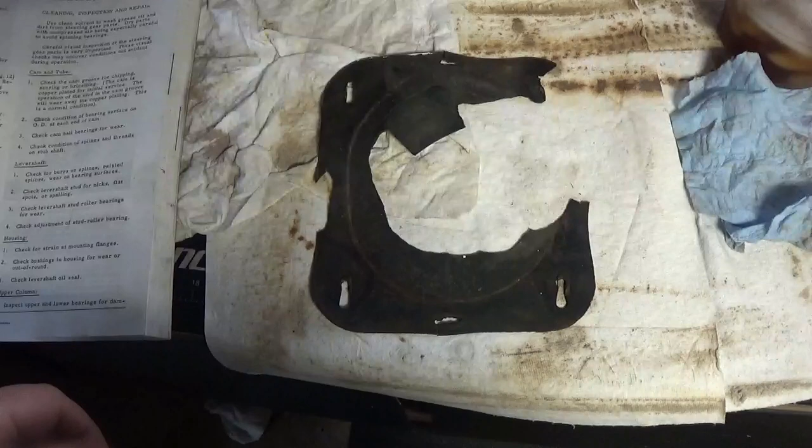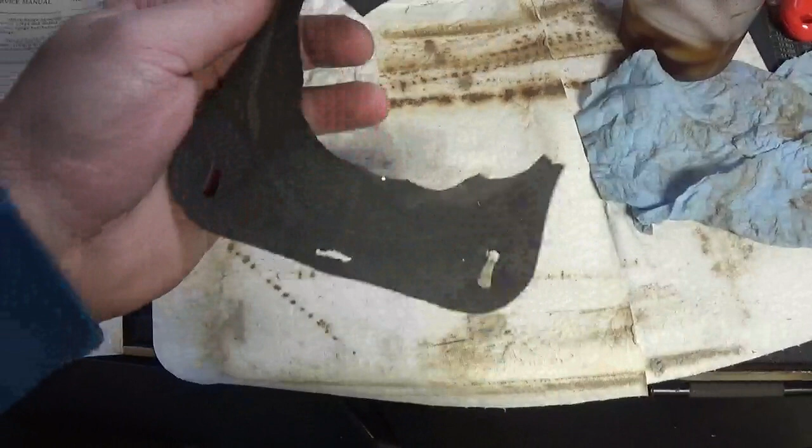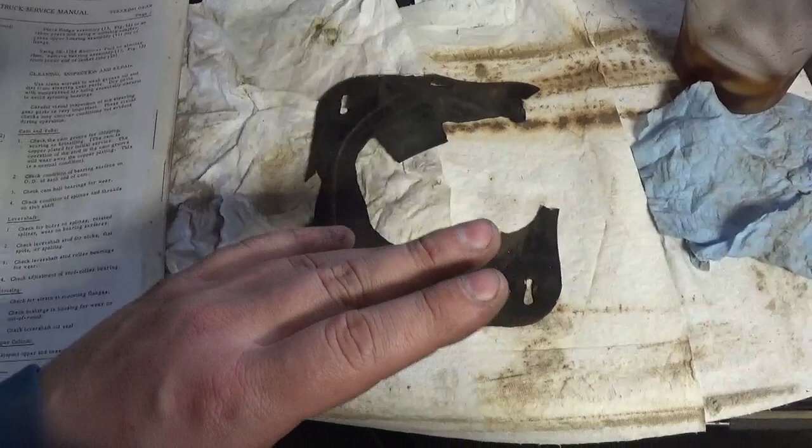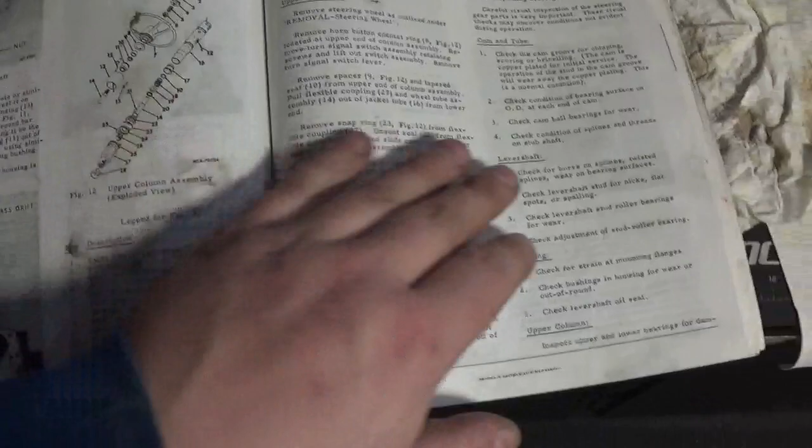In front of you is the steering column seal to the firewall, or what is left of one anyway. I purchased the 3D printed ones that Scouter 1 sells, and they are nice. However, after I pulled the steering column, made it all pretty, and put it back in, the seal doesn't line up with the steering column. I've looked in all my books trying to piece together something I might have done, but nothing really stands out.

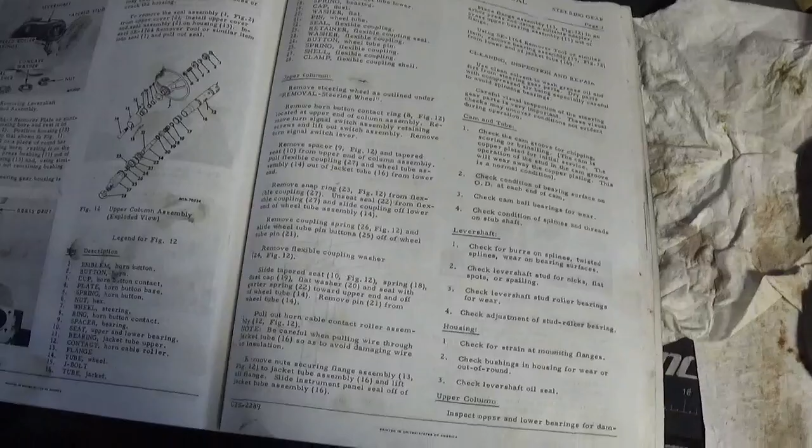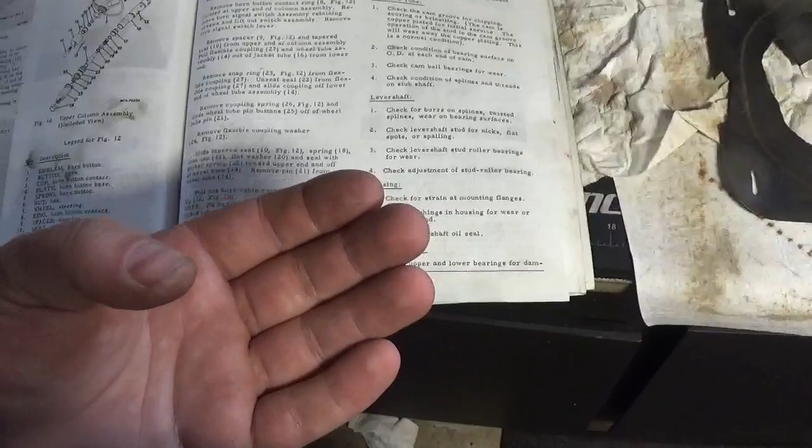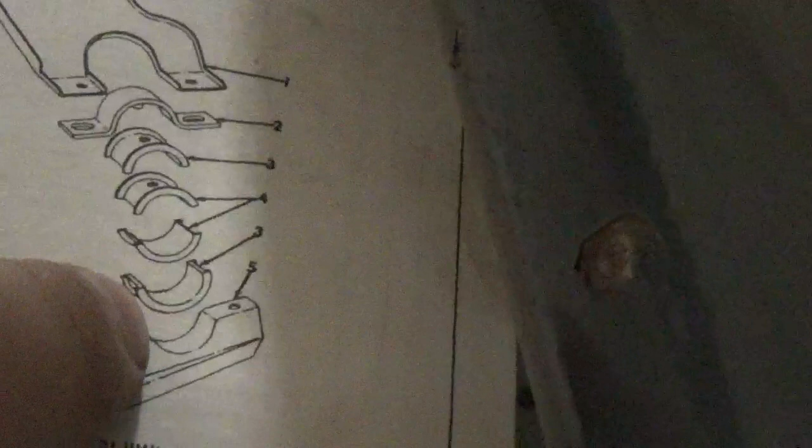The other book shows the two seals that go under the steering column, and it's kind of funky. It's got two rubbers with holes, and then two rubbers with no holes. And I currently just have the two rubbers with holes.

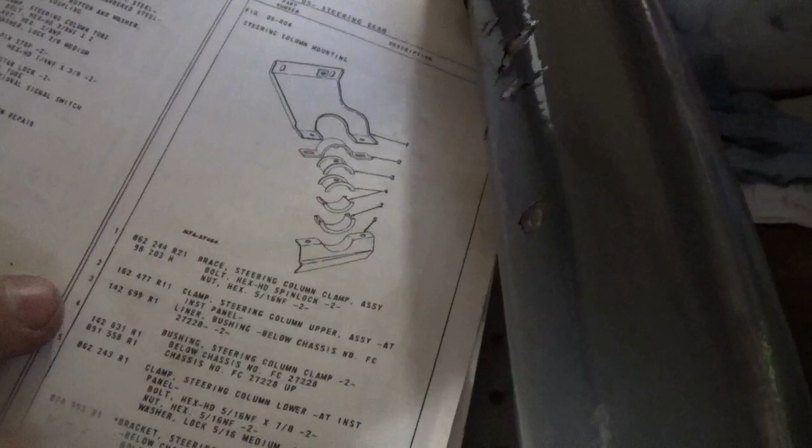So I guess I just need to decode what I need. But either way, it just doesn't look right if I do that. It just doesn't look right. I do have another steering column, I guess I could look at that.

See, what happened is that I was laying on my back trying to put the seal together from the firewall to the steering column, and I might have lost my temper a little bit and smashed the seal.

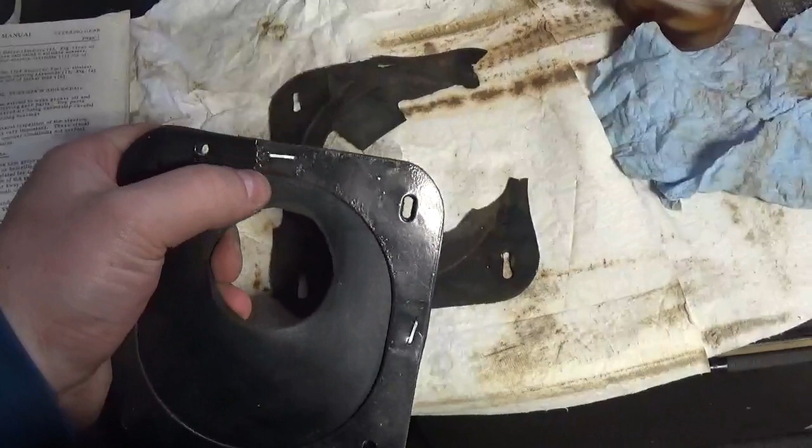So anyway, we went with the old way, I suppose, and I ended up having to cut this when I took it off the first time, so I very crudely welded that joint, gave her a fresh coat of paint, and then bought some rubber off of Amazon, and there it is. Look at that. It was like 20 bucks, plus labor.

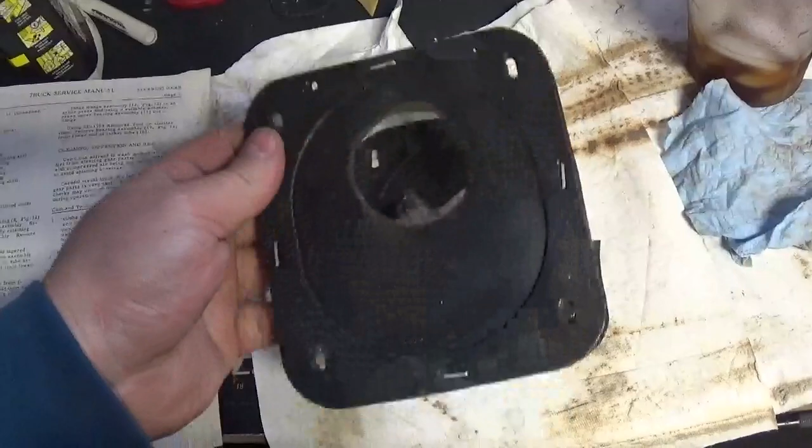These are hard to find, and if you can find them, they're just shot like this one. $30 on eBay. I know what I have.

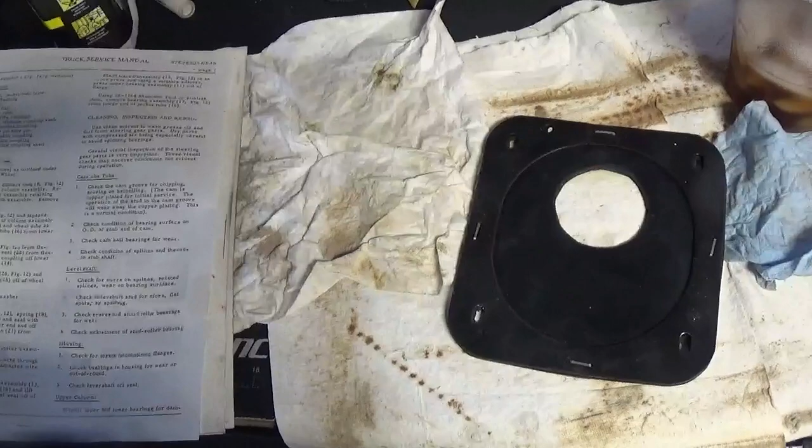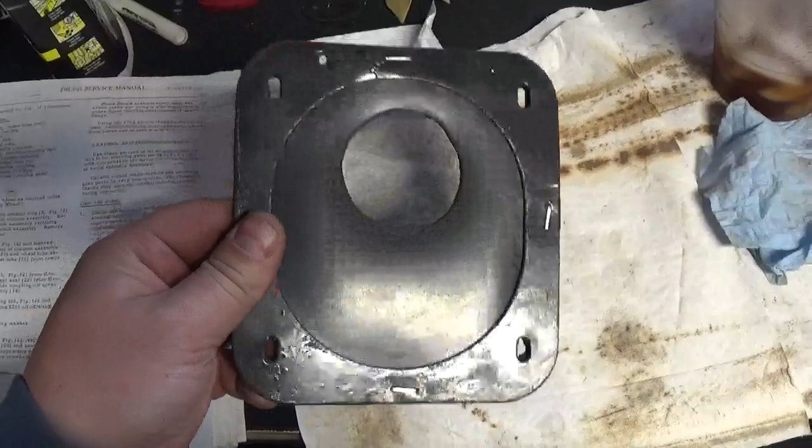Anyway, I'm going to install this seal, hopefully successfully today. I'm going to take another deep dive into my books, and then we'll go from there, I suppose.

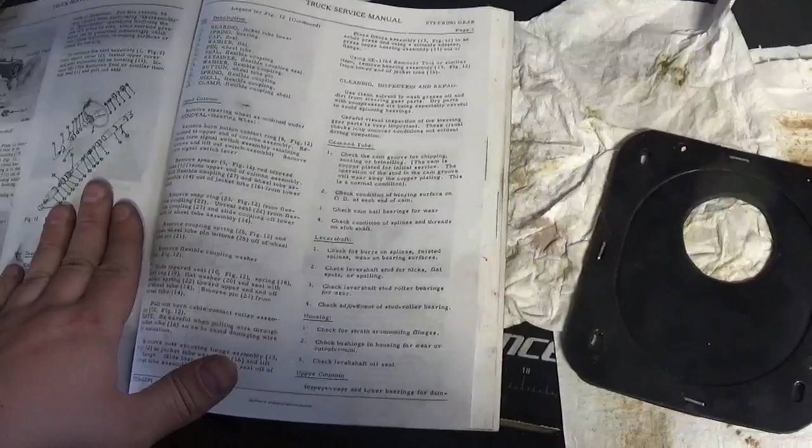The main reason I'm motivated into getting this stupid steering column correct is that I bought a radiator, and they aren't giving those things away for these things. So the hope is to work on the crappy part first, and then work on the less crappy part after, and then the reward is that you can hear it start for the first time in forever.

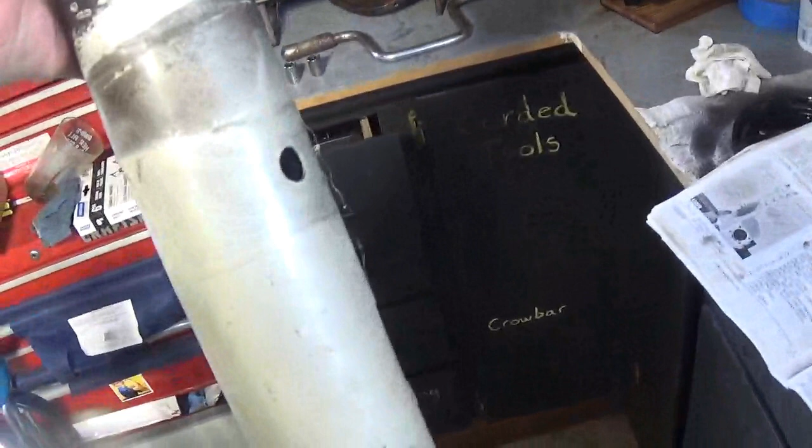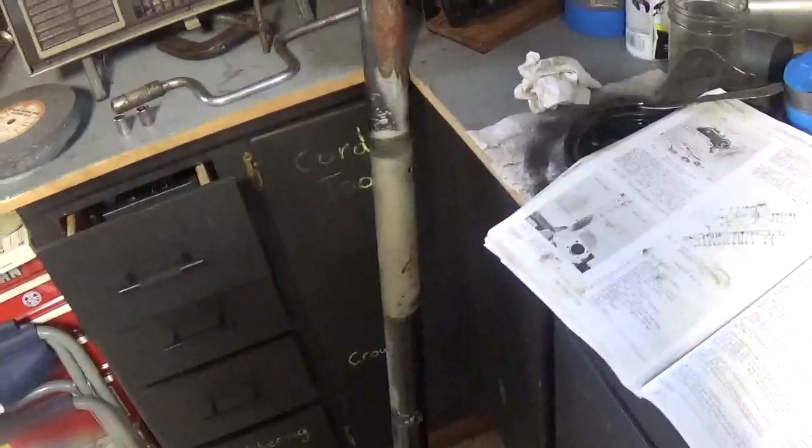That one looks like it had rubber on it, on both sides. Well, crap. Alright, well, I guess that answers that question.

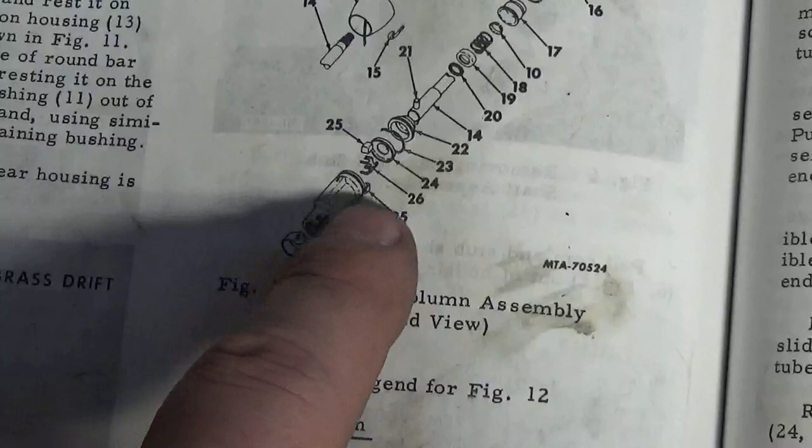Let me put this one in. I'm probably going to have to lube it, probably use some good old Sil-Glyde here, and just lightly lube the steering column, bolt this up against the firewall, and then thread the steering column through it. I'll have to take off this portion here that goes into the steering box, but I think everything else should be able to just slide right through it here. No problem.

And the long and strung out saga of the steering column will be finished. The steering box, on the other hand, that's probably another video. So let me get to wrenching here, and I'll bring you back when things progress.

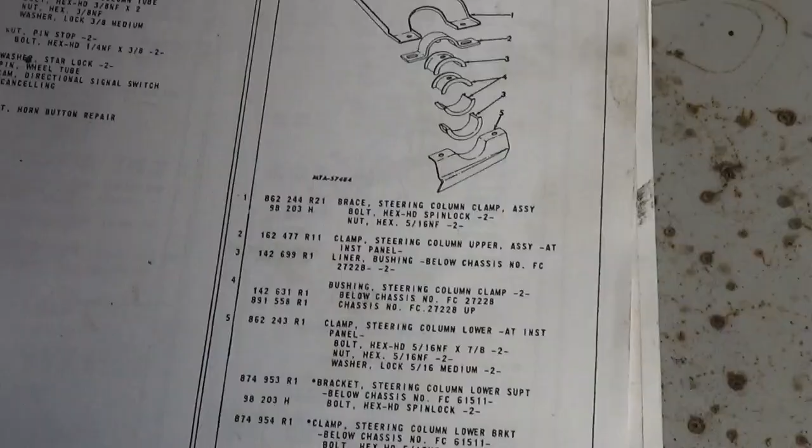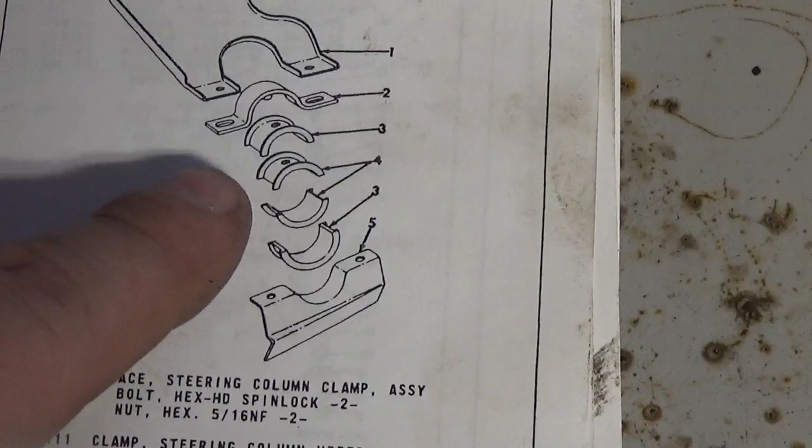Alright, so I have one with a hole, and I have another one with a hole. And according to the diagram, I should only have one with a hole. So at some point, somebody else has been in here. I don't think it would make that big of a difference if they both have a hole. It definitely needs to have a rubber gasket on top of it, or else it just fits too sloppy on the steering column.

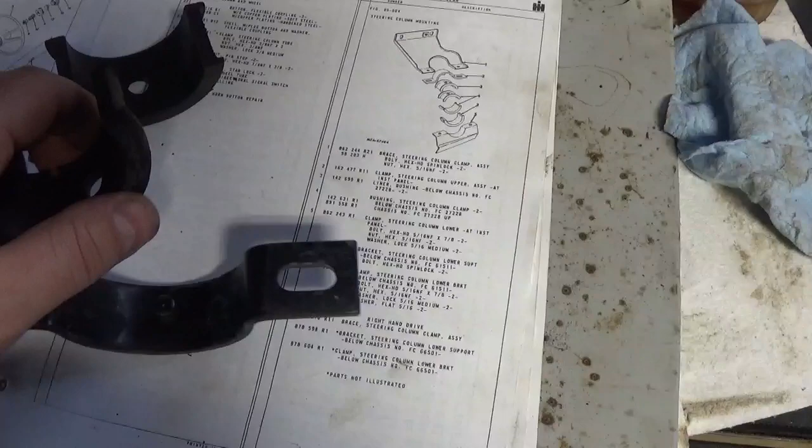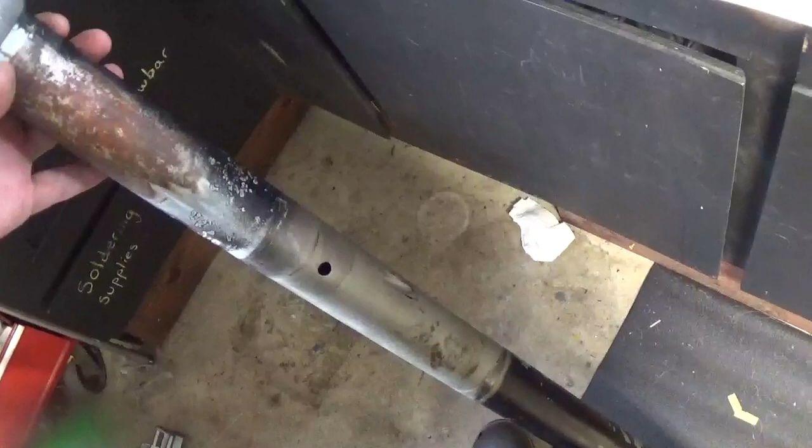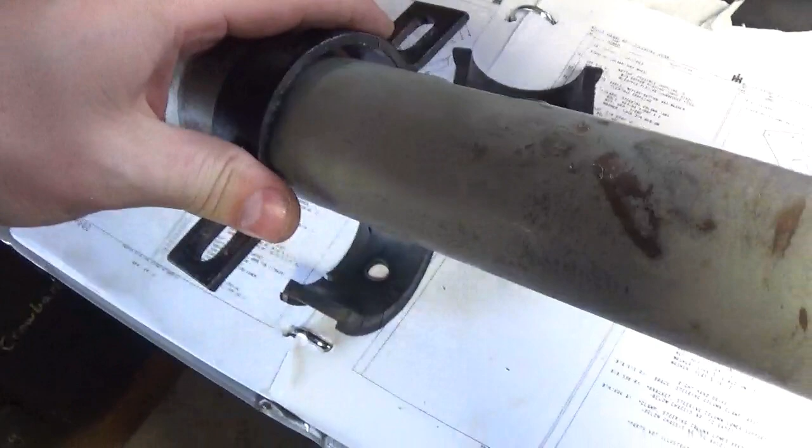And then the arrangement of the pin there corresponds to the hole on the steering column. So without a gasket, not so great. So we need to have a gasket.

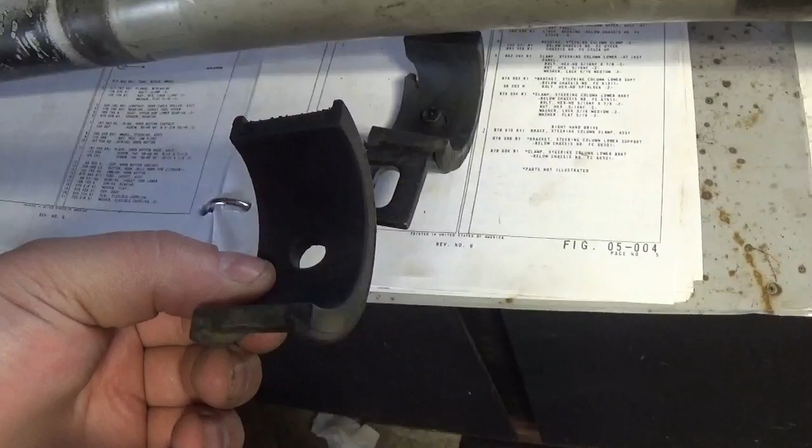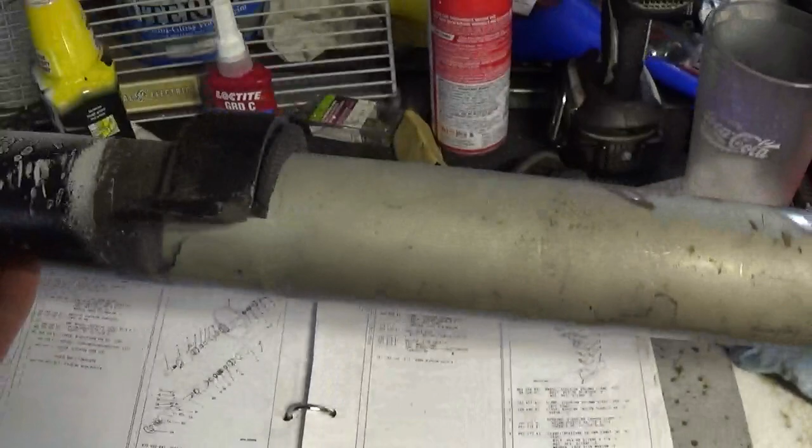The gasket orientation doesn't matter, but the orientation like that won't fit on. Like that. There it goes. So there's one orientation, and there's the other.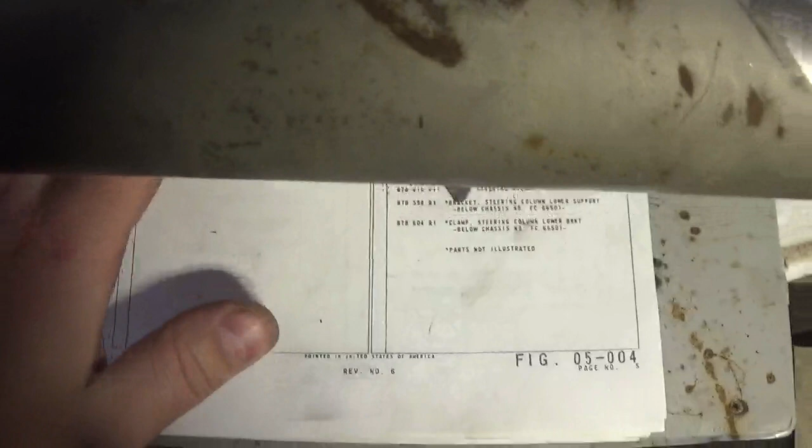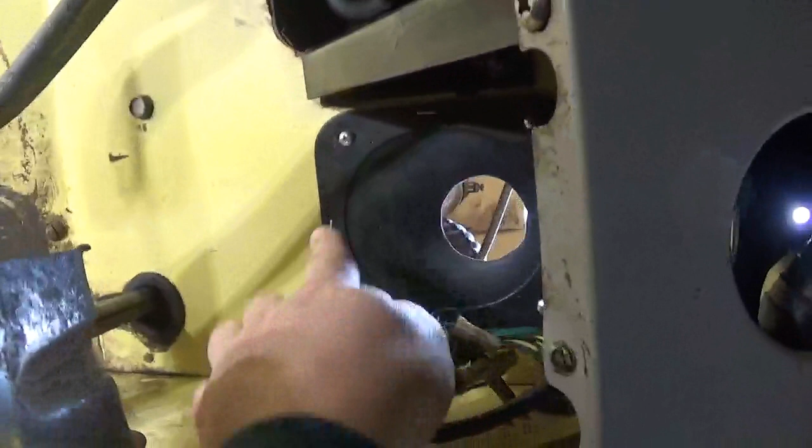So we're gonna figure that out, I suppose. But the gasket looks nice. Those are just some sheet metal screws. I couldn't find what was in there before, or I don't remember.

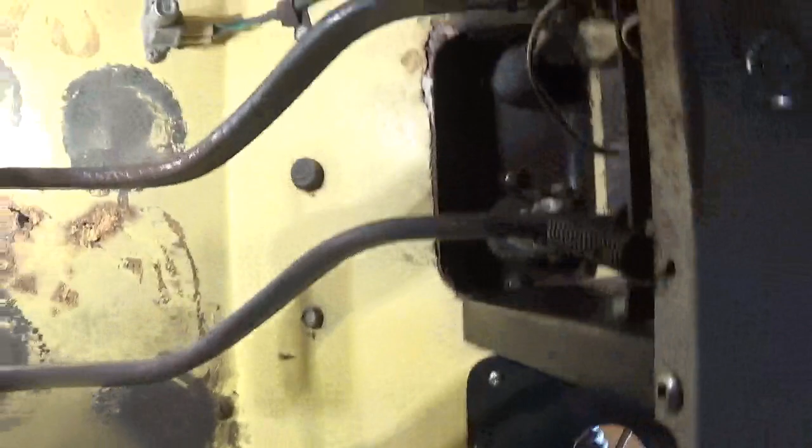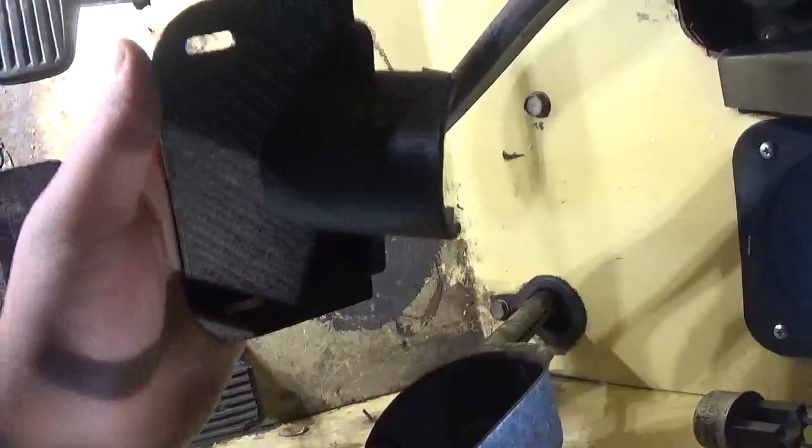I know the kit that you buy from Scouter One comes with screws. So there's one half anyway.

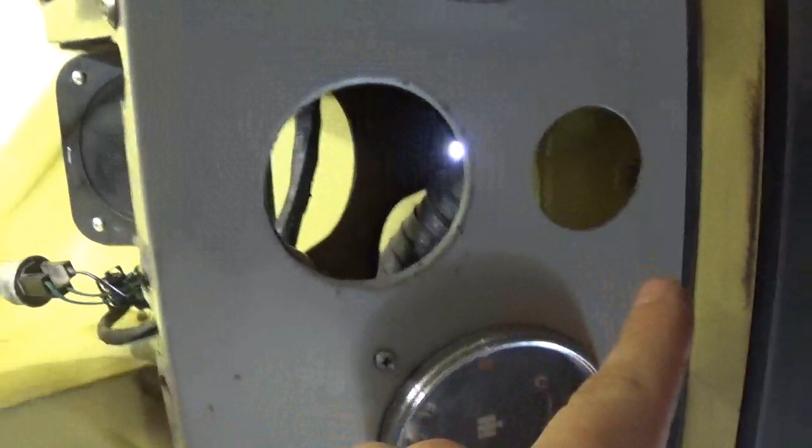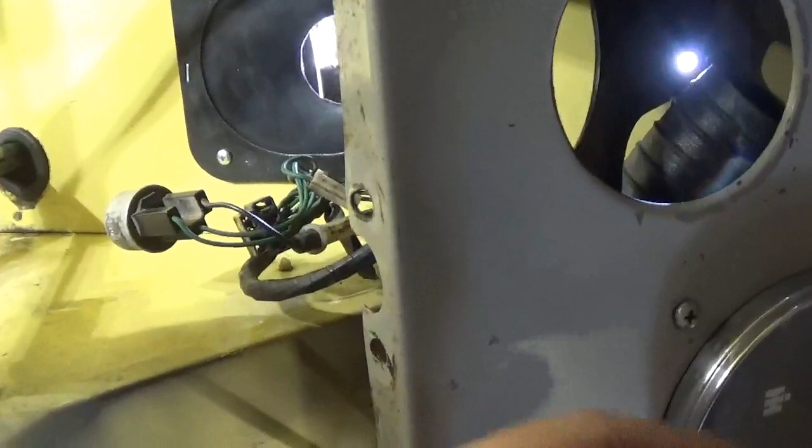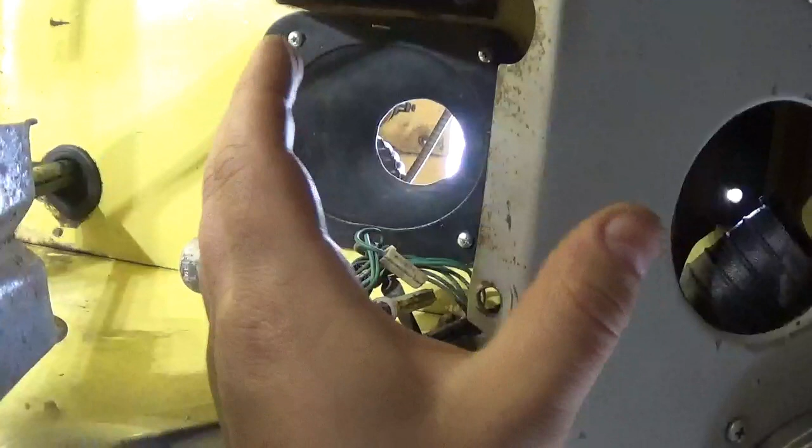So now the trick is to fish the steering column through and not screw up my rubber here. And I was lucky in that I had that spare steering column, so I could try to cut it and then fit it based off of that. So I guess we'll see. I do have a little bit of room to move it if I have to, but I guess we're gonna find out, gents, because that was just a thorn in my side for sure.

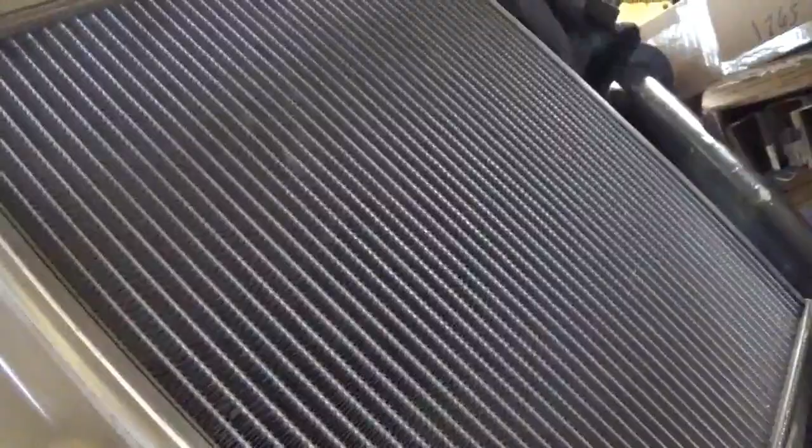Now we gotta fish that thing into there, which won't be fun. And then it's the decision of, it's out again, so should I paint it again just to have it get all screwed up, or just get fed up and throw it in there and call it a day, which kind of feels like the latter. Maybe I'll go in at a later time and kind of finesse it with a spray can. But anyway, I'll embark on the journey here, and I'll let you know.

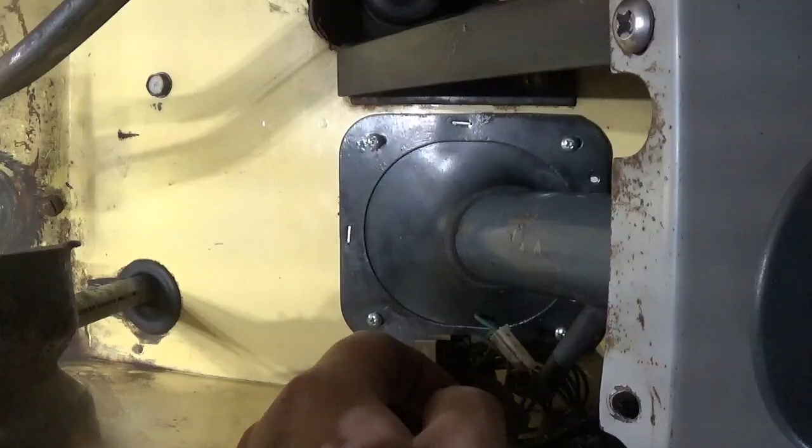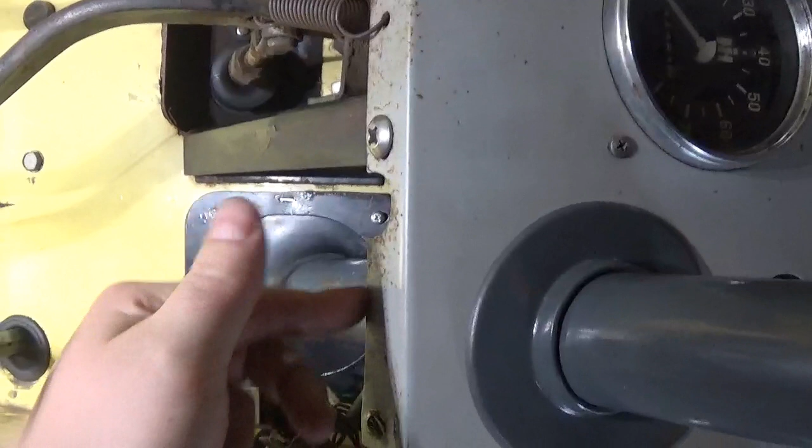Phew! Alright, success. That was a nightmare. Looks good, fits good. There's no visible light coming from outside, so that's nice. The two bolts holding that together were not fun to line up.

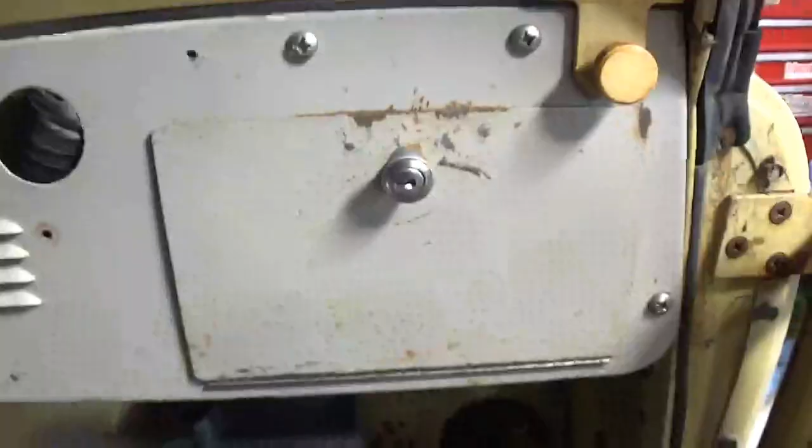Oh, we also got a new latch for the glove box. They're not cheap, but it can lock, so that's nice. This poor thing was very beat up, so we beat it back into a shape that it can work.

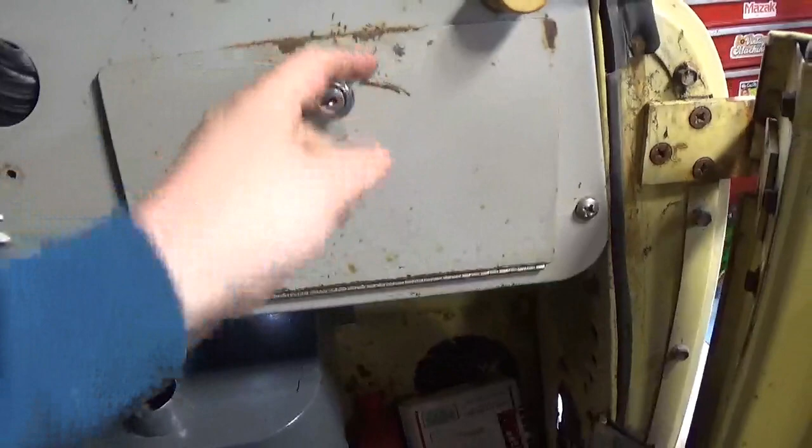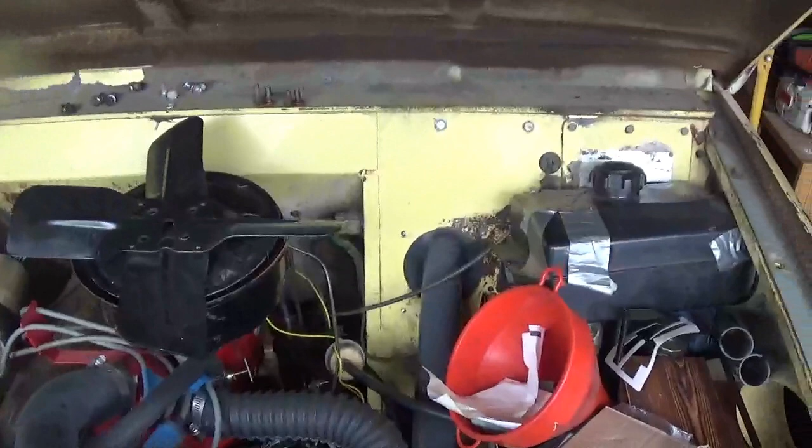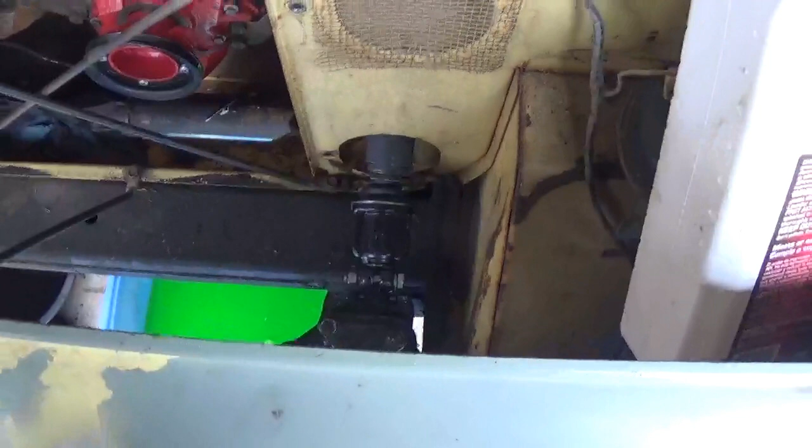Having those two bolts right there all the way out before you put it all together helps. So there we go. There's a factory kit, and it hooks up to the steering box. So now everything should work, hopefully.

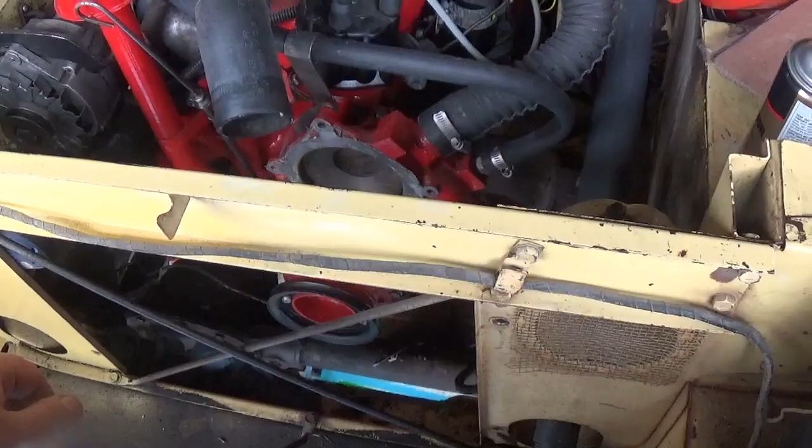So after I tighten that bolt, then we can move on to the water pump fiasco. I just wanted to get that wrapped up before I start sticking that radiator in here, having less room to fuss around with anyway.

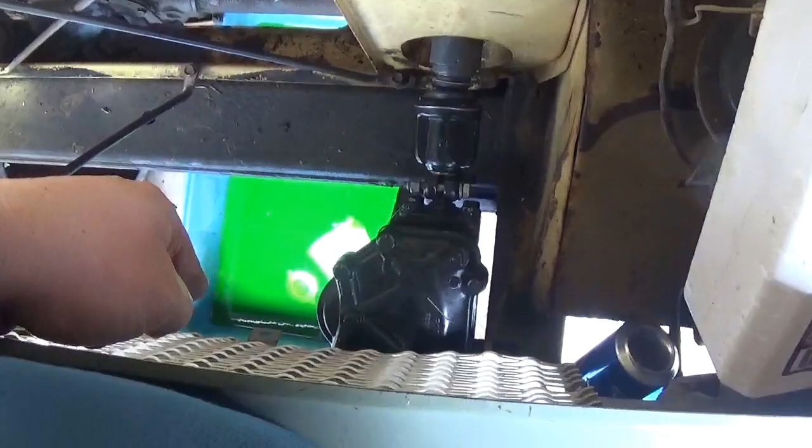So that is terrible. Number one hate working on cars is dash work, because it sucks. Alright, glad that is over for now. I know this makes some clickety clack noises when it's steering, so I think I just have to adjust this bolt here. But steering column in for the final time. Thank goodness. Now we can get on to what I'm better at, which is mechanical things.

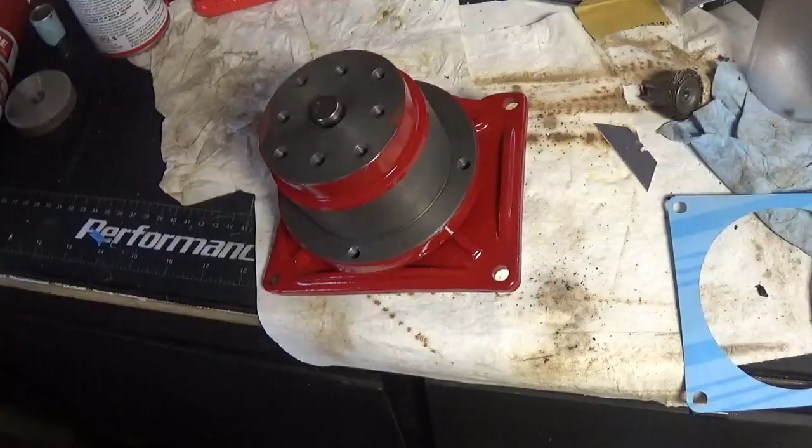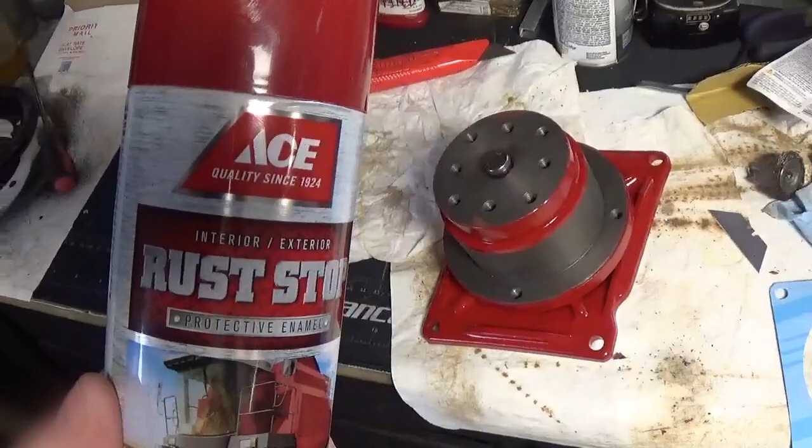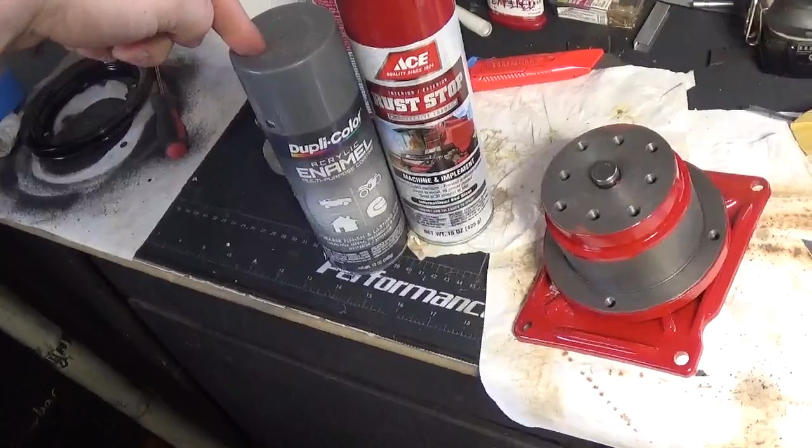So the red I used is the Ace Rust Stop International Red, and there's your number if you so choose to. The Bi-Mart near me also had International Red, but it didn't have it in the 15-ounce can. It had it in your standard size, so for $7, whereas Bi-Mart wanted $10 for just one of those. It sprayed really nice. It has that style tip on it.

So I would buy that again for sure, in case you're wondering. The cap doesn't really look like what the color is - especially in the store it actually looked darker until I took it outside.

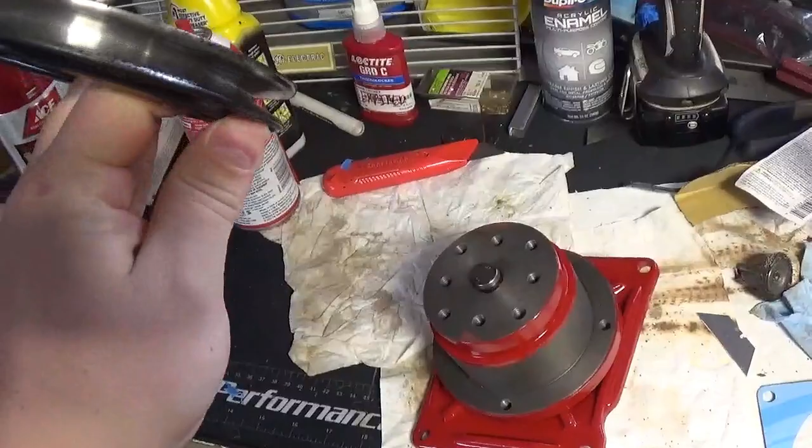So then we can put our black pulley on there, it has seen some things, but actually we're gonna install it first.

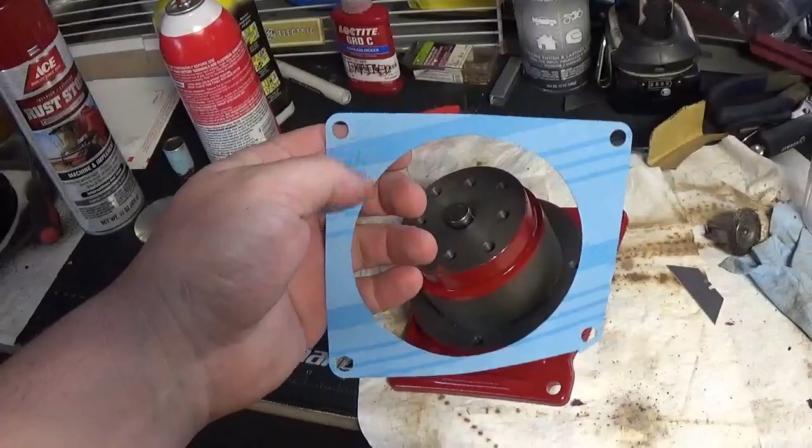So I did end up getting some of the Permatex water pump seal, and then I scrounged around and found that I had a few of these gaskets laying around. So we're gonna coat both sides and throw it together here. And I need to look for the bolts, which I know are on the dash, so probably got to clean the threads up on those.

And yeah, let's see if we can get a water pump in this thing. It's been well over a year. Alright, let me prep where this goes, and then hopefully when you come back there'll be a water pump bolted back onto it.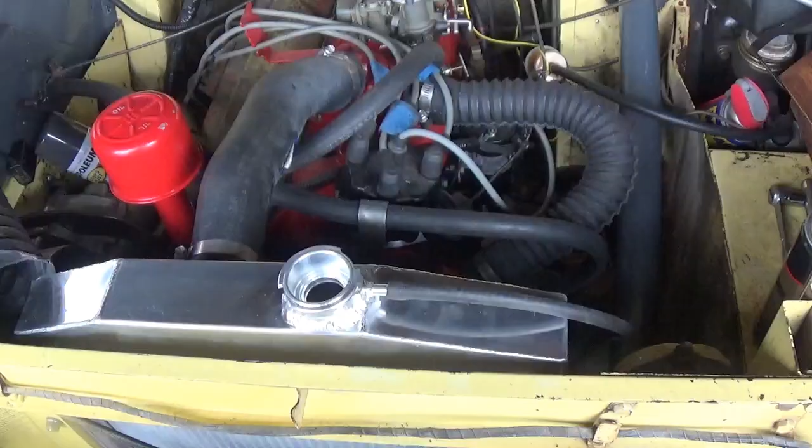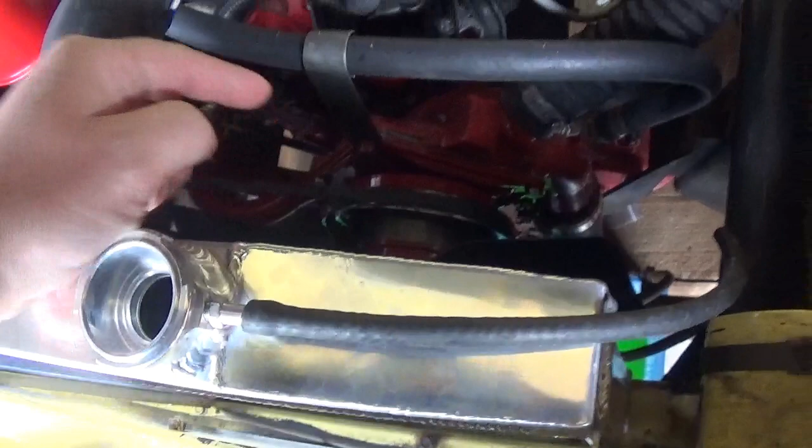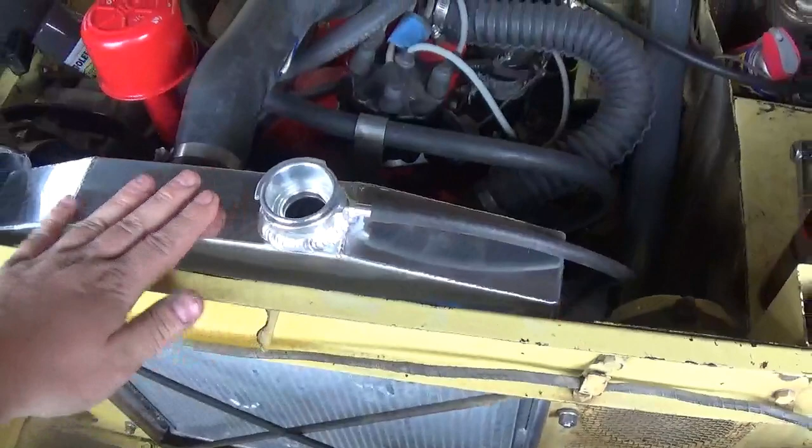Alright, well, we put it together. Everything went together pretty nice. I have to wait 24 hours for the stuff to cure, but I did swing by my local O'Reilly's and picked up some coolant. So I got nice fresh coolant to go into the nice pretty radiator. Got a little bit of a wallop down there, but I'm hoping it'll keep all its liquids inside.

So in the meantime, I've got the belt on, put the fan on. It does still turn over. The battery was pretty dead, so I had to charge it again. The blower motor did work.

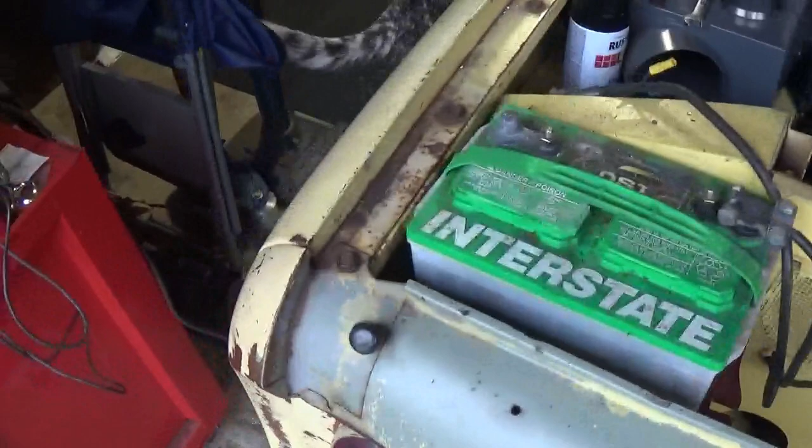And so now I'm just gonna - well excuse me, thank you - we're just gonna clean all the stuff off of it.

Hopefully tomorrow we'll be able to pull the darn thing out, which will be nice, right? Will that be nice? Huh? Maybe? No. Tail wag means yes. That's what I thought.

Alright, well, I'm gonna open a cold beverage and kind of nitpick away here.

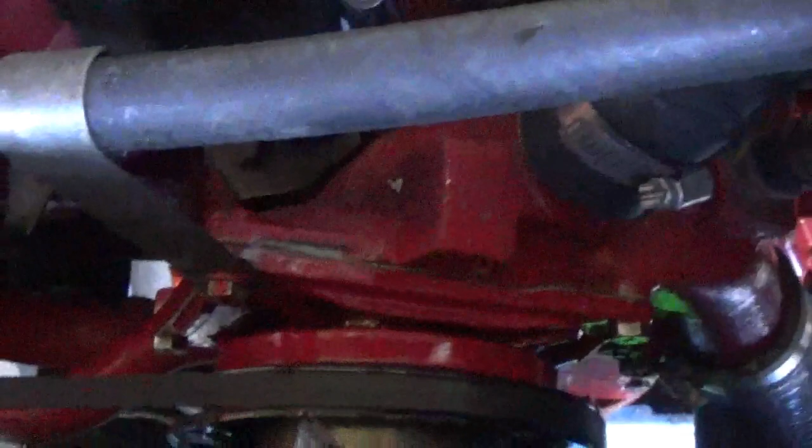I don't hear any drips, which is nice. The seal held pretty good, and that paint matches pretty darn good, so I would be happy with picking up some more of those.

As you saw from the backfire, it definitely needs tuning, and I believe I don't have a usable timing light. I might - I'll have to dig around and see, but I need to clean out the oil bath air cleaner. I need to mount that, and then that's how you need to tune it with that on there, and then rig up the choke, and then it still couldn't idle down low enough.

I think it's how I have it set right now. It didn't flood, so that was pretty nice. So maybe the piece of dirt or whatever in the carburetor finally decided to go away.

After properly tuning it, I think our next hurdle is our gas tank situation. And this time it actually idled for quite a while, even when that thing was barely like half full. It actually consumed the amount I thought it would, whereas before it would just suck it right down, probably because of the poor idle settings or the vacuum leaks, one of the two anyway.

So we need to definitely upgrade our gas situation. In the meantime, I was hoping I could pull it out of the garage here because it's quite messy behind it, and I need to flip it around so the gas tank will be on that side because I'm working on the driver's side, and as it sits I can't really access it.

It's a little cramped, so this might be a next weekend project.